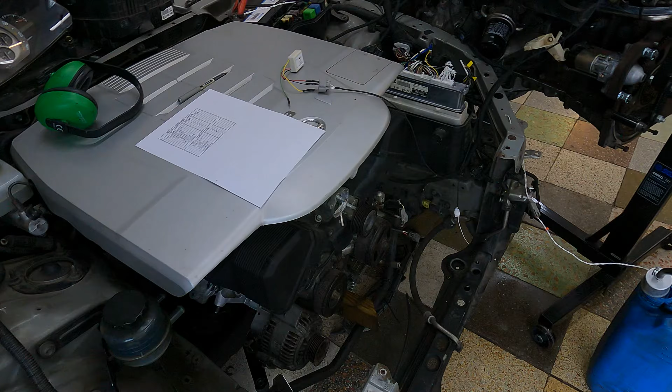Hello Seamus, this is your IS300 to IS200 plug and play harness. It is the adapted harness. Obviously we've used the original IS300 harness for you there. Obviously everything plugs in. This is your ECU. You've got your little patch harness there because obviously the ECU plugs are different to the IS200.

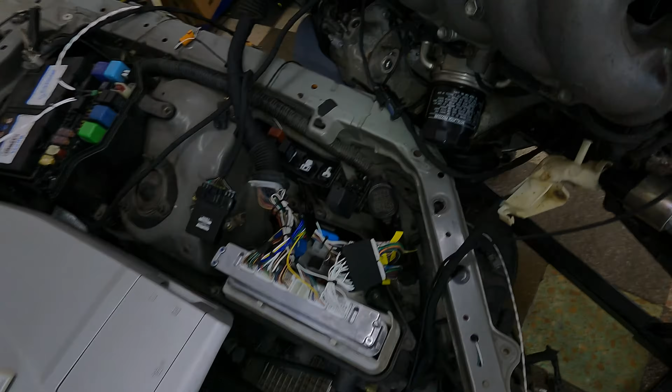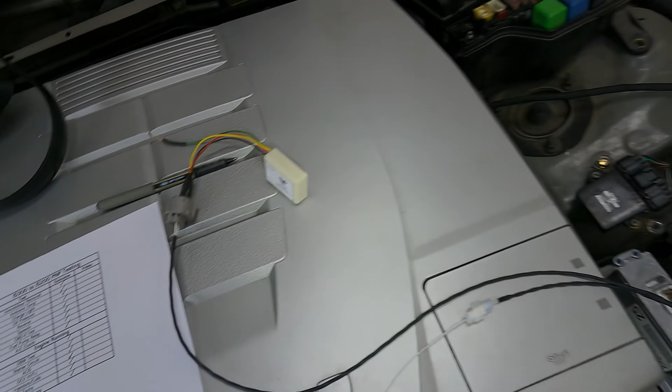Everything in here plugs in. That's all been changed around to be correct. And obviously using the J160 manual gearbox. So we've got the actual gearbox harness coming down here. So you see there's your reverse plug. There's your speed sensor plug for the J160. All right. So nice and simple.

Obviously it comes out the ECU box here. Now obviously I've got the engine here, so just bear with me. But yeah, so it comes out there, goes into the top there. You've got a section that goes underneath here, which bolts down there. That's obviously where all your injectors go. Your cam sensor goes. You've got your purge valve over there, or evap valve over there. You've got your ACIS over here underneath with this little canister.

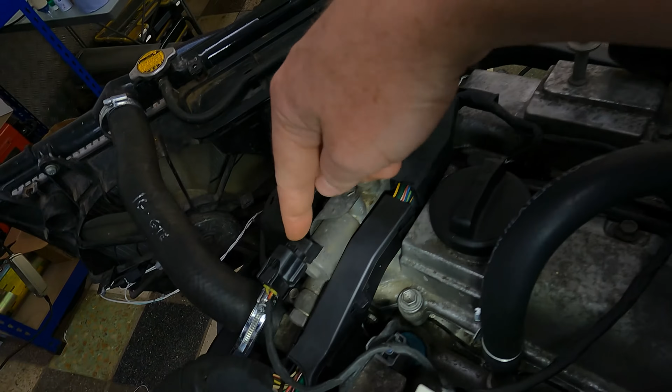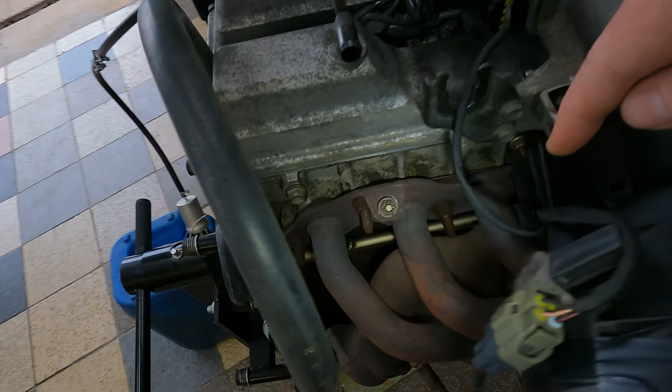Then you've got the section that goes over the top there, which is where your coils come out, and you've got your 3 coils along there. You've got oil control valve, and that comes out with these 2 front injectors over here. And then coming around the front here, you've obviously got this going along here to your drive-by-wire motor and clutch for your drive-by-wire throttle. Coming along the back here, you've got your pedal position sensor, and you've got your lambda sensor for bank 2 sensor 1.

Coming down the front here, you obviously got the breakout for your crank sensor, which is this one over here. You've got your alternator plug over there. You've got your thick cable for your alternator, which bolts on over there. And then you've got your lambda sensors for your bank 1 sensor 1 and bank 2 sensor 1. Sorry, bank 2 sensor 2.

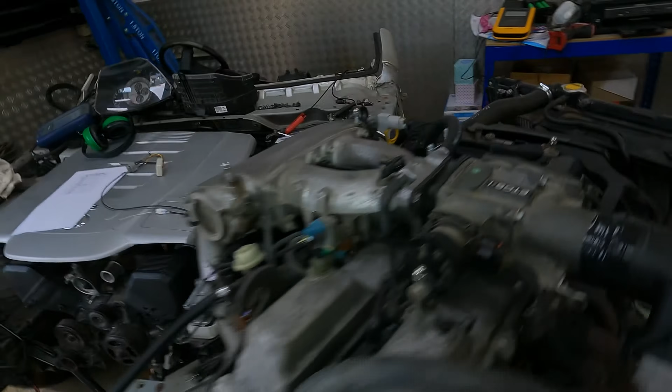Okay. Now we have wired up the other sensor. So in your IS200, you've got the sensor on the inside that goes along the exhaust over there. So just remember, you do have to fit that one in, or else you will get an error code for that. So it's basically that one over there that comes out and goes into the tunnel there. So make sure you put that one in.

Coming out the grommet, we've got your resistors, obviously, to remove the codes for the gearbox, as well as your ATEMU device or automatic transmission emulator. Okay, that's all hardwired in there for you.

Just a little note, obviously the IS200 ECU box doesn't fit the IS300 ECU. If you can get your hands on an IS300 ECU box, that'll fit straight in. Otherwise, this little lip around the side here, you can just grind that off, and then that will actually push all the way down. So there's your 2 options for you if you want to fit it in. So that's all of that.

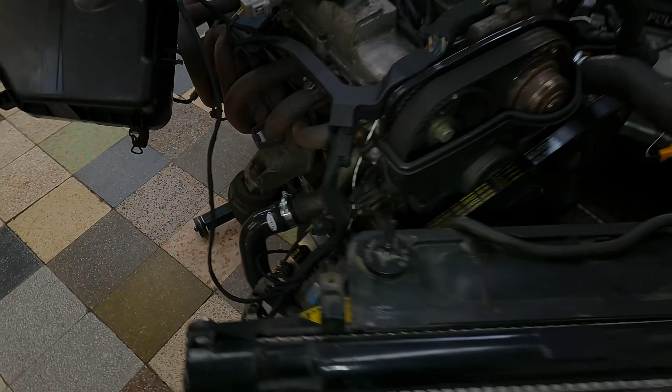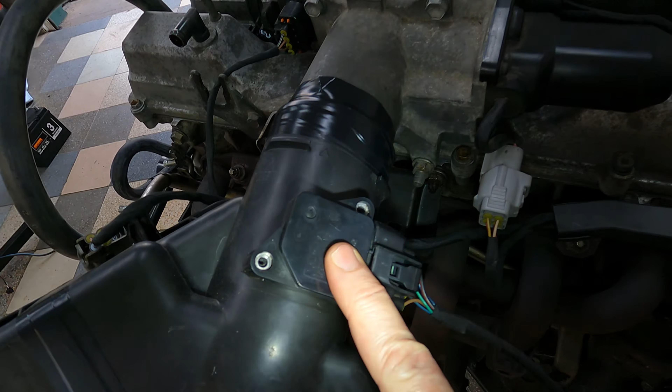Oh, and then the last one is obviously your mass airflow. So it comes out here at the bottom, and it goes into your intake pipe over there. So same type of MAF like this. This is the one that you need for the IS300. Okay, so hopefully you got that with your engine.

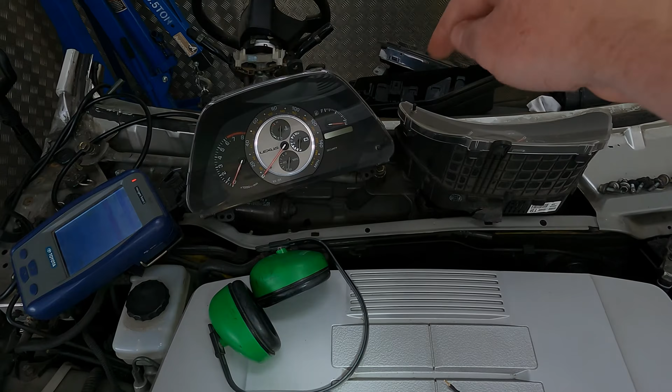Right, so what we're going to be testing is quite a few things. So number 1, obviously we removed the immobilizer, so we'll test that. So you'll see at the moment we've got a flashing security light. As soon as you put the key in, that'll go out. We're going to check the ambient temperature, or the outside temperature. So that's going to be on the inside where your climate controls are. We're going to check the charge lights and the oil pressure lights. Just make sure they come up on the dash, and obviously when we start it up, they'll go away. So we know that they're working fine.

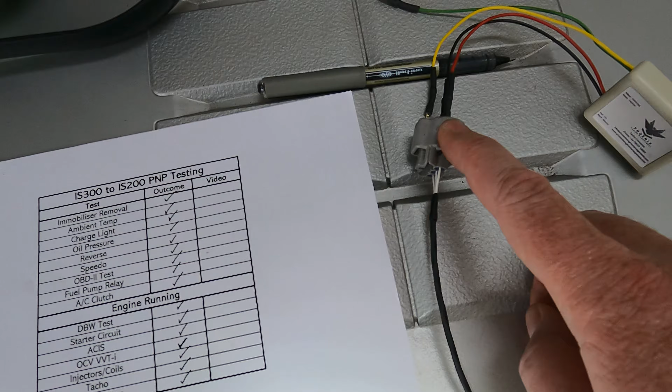We're going to test the reverse by bridging the reverse circuit. That'll make the beep go on. We're going to test the speedo by feeding a signal into the speed sensor plug, and that'll make the dash speedo work. We're going to obviously have our OBD2 machine plugged in here. So again, this is literally just plugged into your standard OBD2 port. This is the one that's obviously under the dash, hidden away. Obviously I've got no dash in here, so it's all hanging.

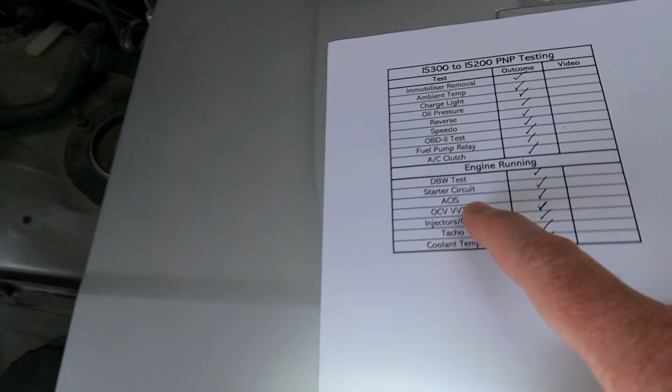Okay, then we're going to test the fuel pump relay via the OBD2 machine, just to show that's working. And then we'll test the AC clutch as well via the OBD2 machine, and you'll hear the relay in here click. So obviously that all works as it should. So effectively, as long as you plumb everything up correctly, that'll be fine.

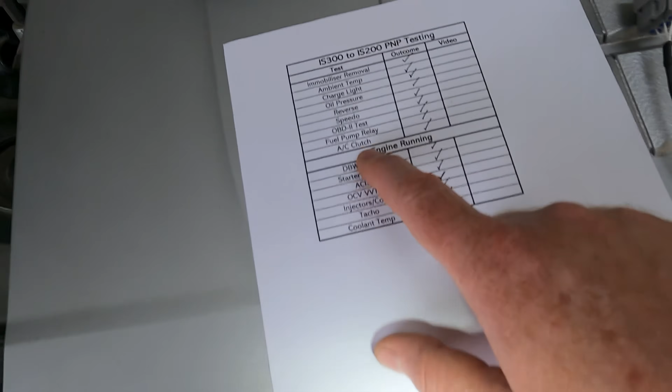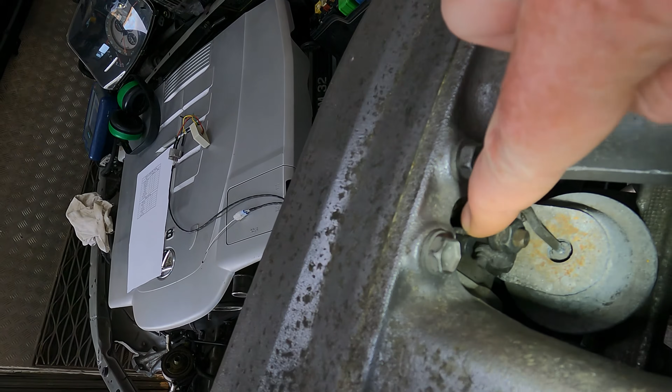Then obviously when we start the engine, we're going to test the drive-by-wire. So that's just basically pulling the accelerator, nice and simple. The starter circuit will be tested obviously as we crank it. We're going to test the ACIS, or acoustic control induction system. So that's basically this little valve over here. So it rests in this position over here, and as soon as I test it with the OBD2 machine, you're going to see it's going to pull closed. Okay, and that's controlled by that little canister and everything underneath there.

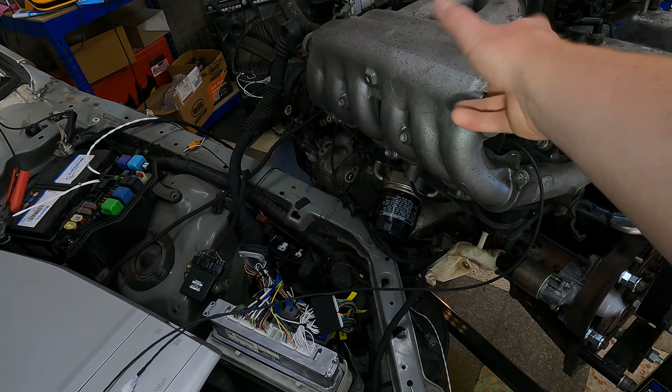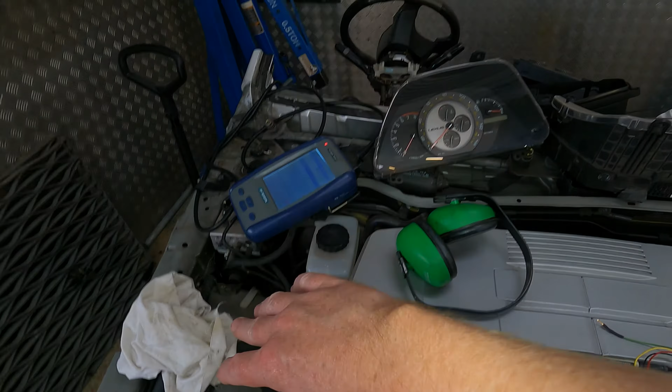So I've got a video on ACIS and how it works, but effectively it just halves the intake runner length, and that's what the little valve does. It opens valves and closes valves in there. Okay. We're going to test the oil control valve. So what we're going to do is we're going to go back to the OBD2 machine. We're going to test it. It's going to put the VVT into, like, max advance and so on and so forth. So the engine's actually going to make a horrible noise, probably die, but it means that it is actually working.

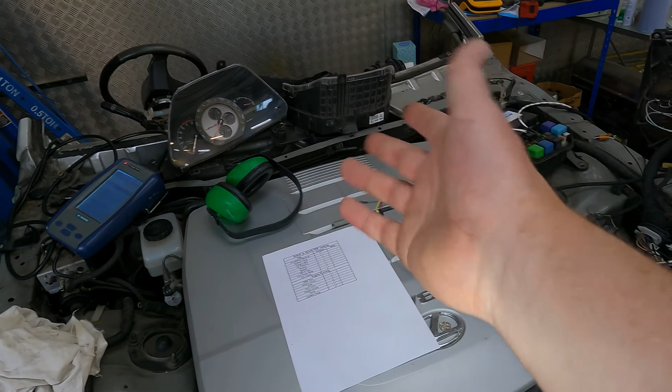Then I'm going to run around and I'm going to unplug all the injectors one by one, so we can see each actual cylinder is firing, but you'll hear it's pretty smooth when it runs. Obviously tacho is then going to come up on the dash here, so we can see that. And coolant temp as well, so we'll be able to see the coolant temp there. Obviously I've been testing it, so as soon as I put the ignition on, you're actually going to see the coolant temp because it is actually up to temperature now. Okay, so right, let's get to it.

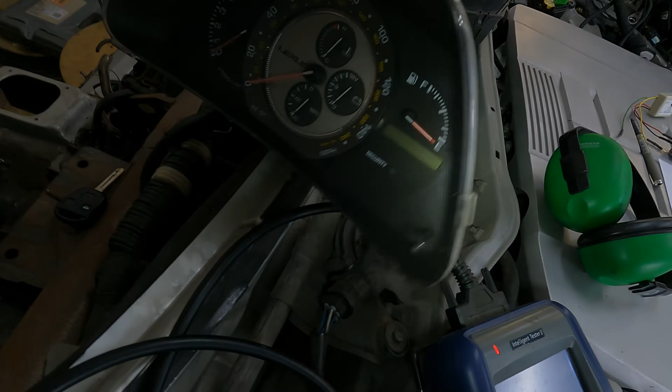So first thing we want to do is we want to test the immobilizer. So on a Lexus and a Toyota, the immobilizer is obviously indicated by the flashing LED over there. Now, obviously we've just removed the immobilizer, but we keep it so that it looks like you have an immobilizer. So you take the key out, the security light flashes. So if anybody walks past, they think you still have an immobilizer. Now then, I'm not even going to turn the key. All I'm going to do is literally put it in, okay?

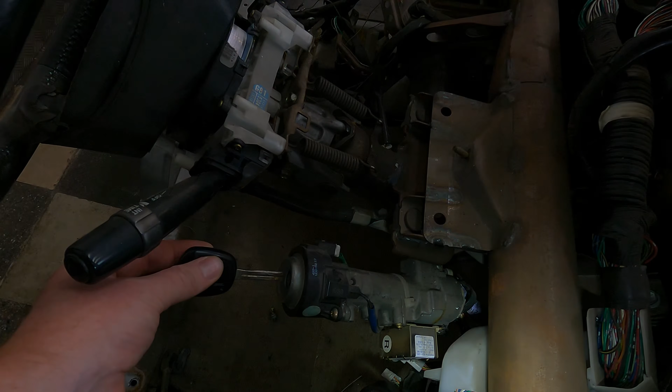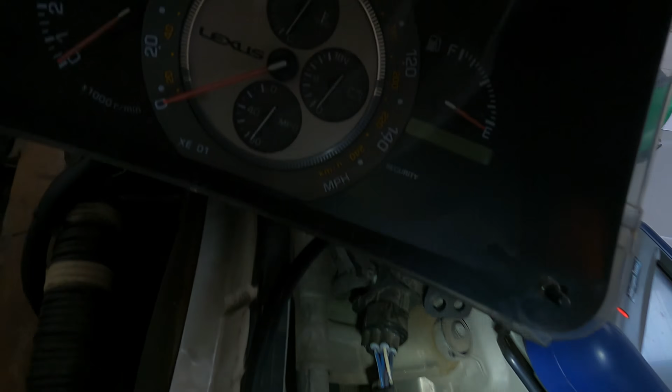And what that does is there's an actual key sense switch wire in there that goes to the ECU. It tells the ECU to turn on the relay, which then reads the key. So you'll see I'm not going to turn it to on because nothing else will come on. But as soon as I insert the key, you'll see now the security light has gone out. Okay, so your immobilizer is obviously deactivated.

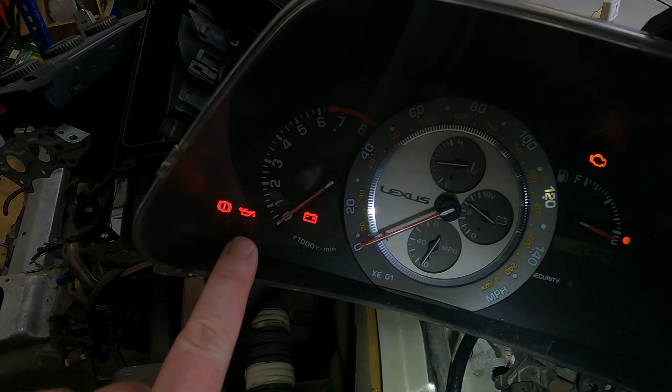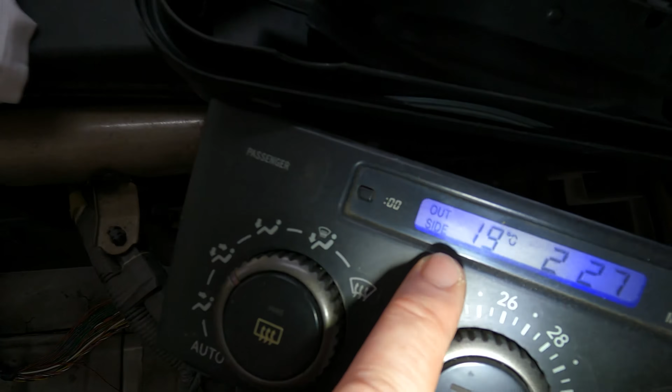And as soon as I turn the ignition on, you've got check engine light, you've got battery light, you've got oil light, okay? Now the IS300 did have a VSC system, not a TRC system. So I've removed all the TRC bulbs in here, but just make sure you do remove those bulbs, okay? Then coming along to here, we're just gonna check our ambient temp. And as you can see there, 19 degrees, so that's absolutely fine. So we know that's working 100%. Just going to turn this back around here so we can see it. Okay, so we've done immobilizer removal and the ambient temperature. We've obviously seen that we've got our charge light or alternator light and our oil pressure light.

So next up now, we're just going to bridge this reverse. So this is exactly what your gearbox does. So if you just bear with me. Right, so you see, I've just bridged it like that. And we've got our annoying reverse beeps going on there. So I'm just going to remove that, get rid of that.

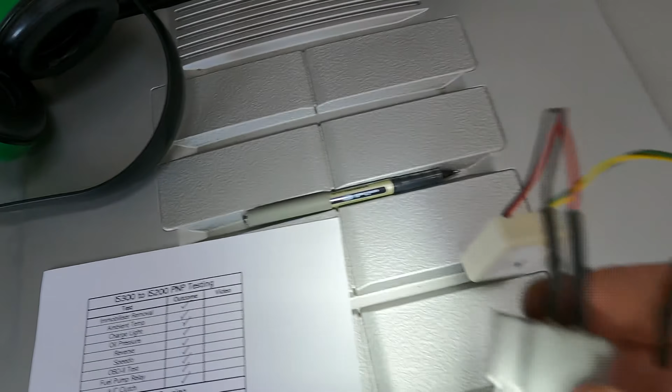Right, so next up we're going to do speedo. So effectively I've got a little device here that's going to output a signal from there. So what I normally do to make sure the system is working 100% is, this requires power and ground. So this is a Hall effect sensor, so you've got 12 volts and you've got ground, and we give the signal out. So I know 100% that this plug has all the signals that it requires to work. So just bear with me a second while I put it into test mode.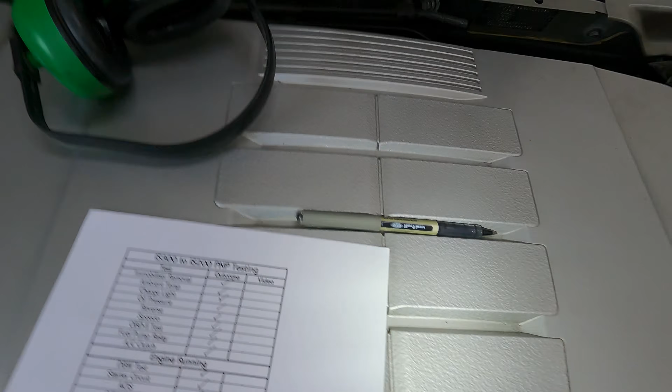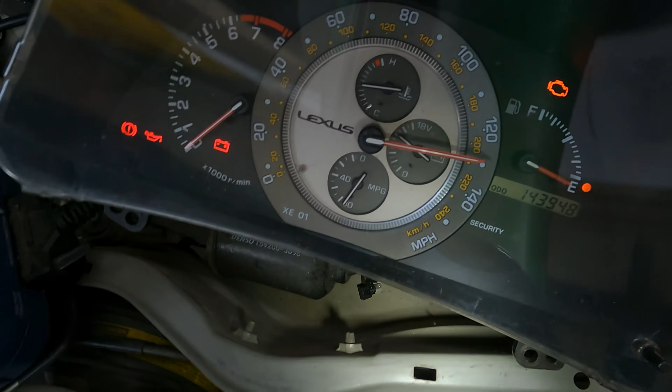Fantastic. Okay, so all I'm going to do now is pin number 3, the yellow one, which goes to the signal. And you see there now our speedo shot up. So we've got our 3 wires plugged in there. So I'm happy with that. Okay, so I'll quickly disconnect that, and as I disconnect that, well, that one's done. Right, okay, so we're happy with that.

Now we're going to go over to our OBD2 machine. These take ages to read, so I've already done it, but I'm going to quickly go into function. I'm going to go into system select, and you can see there IS300. So it is picking up that it's an IS300. All right. So we're going to go into there, and then we're going to be able to see all the live data like we would normally.

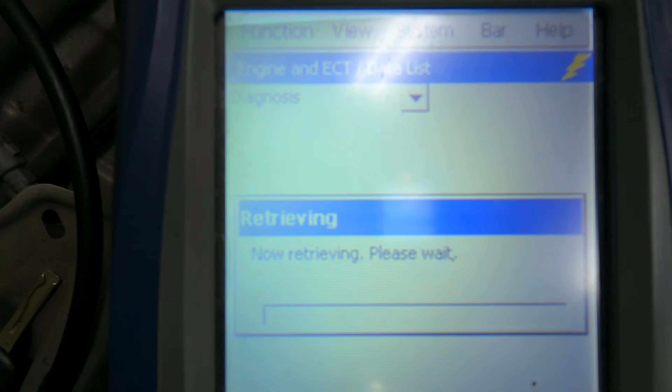So we'll just go into data list, and we'll see all the data start to appear there. So there you go, 78 degrees, 31 degrees intake air temp, 14% throttle. And as you can see, our coolant temp is working on there. So that's all perfect. All right.

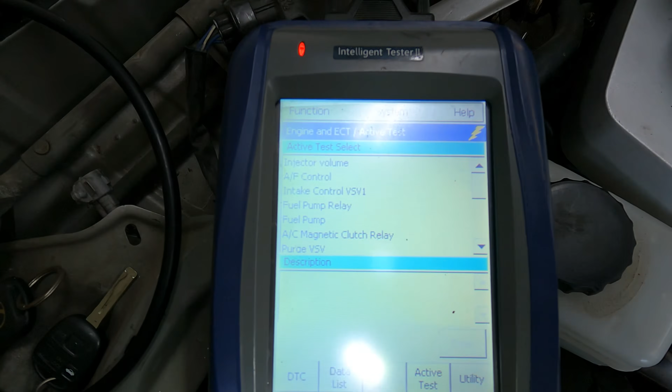So what we're going to do now is test the fuel pump. So I'm just going to go into active test. Now it says fuel pump, relay, fuel pump. I've got a video on how Lexus and Toyota fuel systems work, so if you are interested, go watch that. That explains why you have 2 different sections there. We're only interested in the fuel pump.

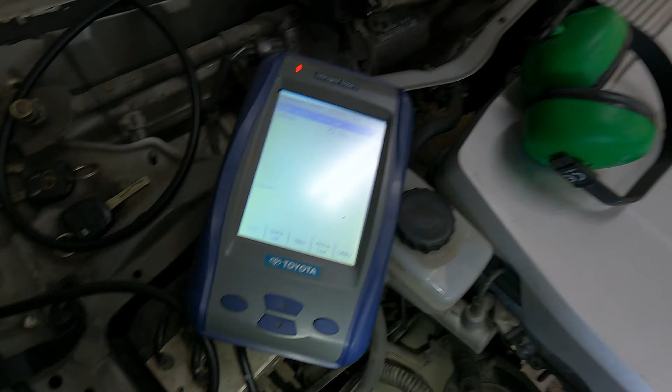Okay. And what I'm going to do is press that button to turn on the pump, and you can hear the relay clicking. And more importantly, you can hear the fuel pump working.

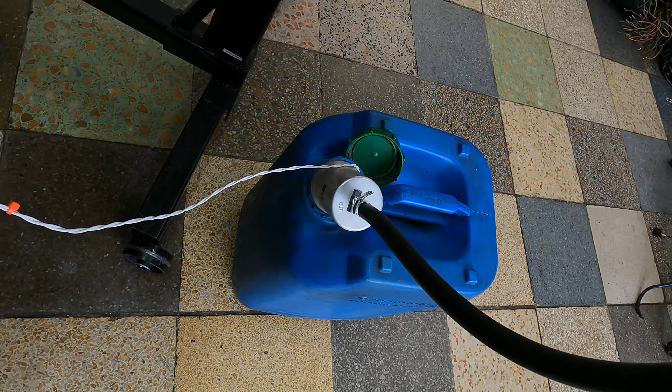Okay, so obviously the fuel pump's controlled by the ECU. Do watch the video about the fuel systems because it explains things like, obviously, they don't prime. So when you put the key in, it's not going to prime the pump. So just be aware of that. That is perfectly normal. That's absolutely fine.

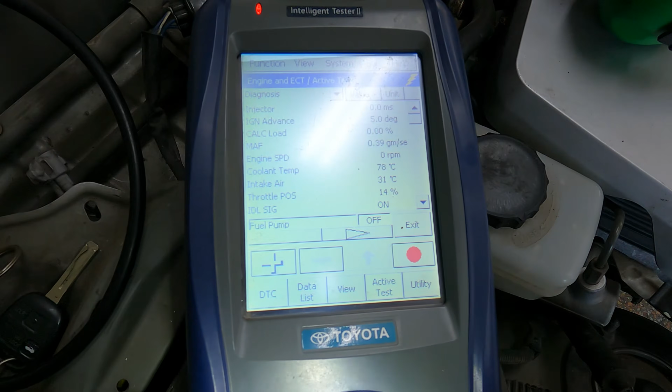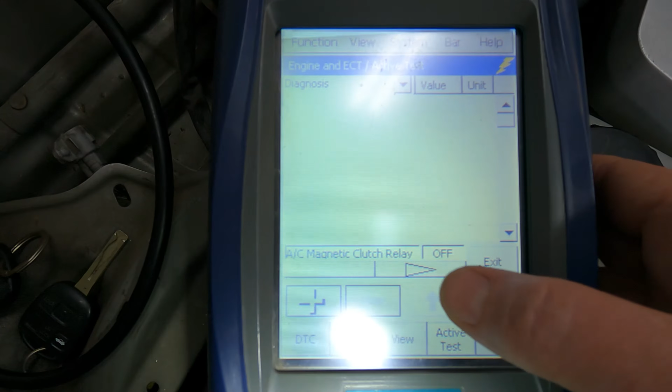Right, so next up we're going to do AC clutch. So again, we're going to go into active test. We're going to go AC magnetic clutch relay. Enter. And again, what we're looking for is obviously the clutch. Okay, you're actually going to hear, I've got it plugged in on the engine now. I'm just going to bring it a bit closer, but there's your AC relays.

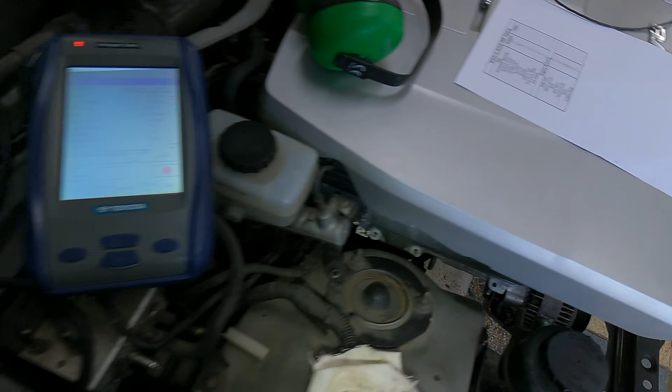Okay, and you might be able to see over there. Let me just see if I can. Okay, so I'm happy with that. The actual magnetic clutch on the front of the aircon pump, that's working, and the relay inside the car. So as long as everything's plumbed up and all your pressure sensors are there and working, AC will work just fine. Okay, so all that's left now is we're going to fire her up.

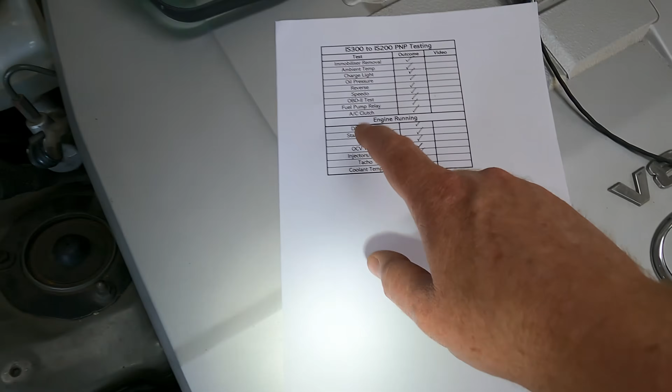We're going to test the drive-by-wire. Starter circuit will obviously be the fact that it starts up. It's nice and simple. We'll then go to the machine and we'll test the ACIS and the oil control valve. So the ACIS, I'm going to activate it on there, and then we're going to see this little valve. So this is the resting position, okay? And as I do that, this valve is just going to turn like that, okay? So that's effectively how we're going to do it. I'm going to show you that's the case.

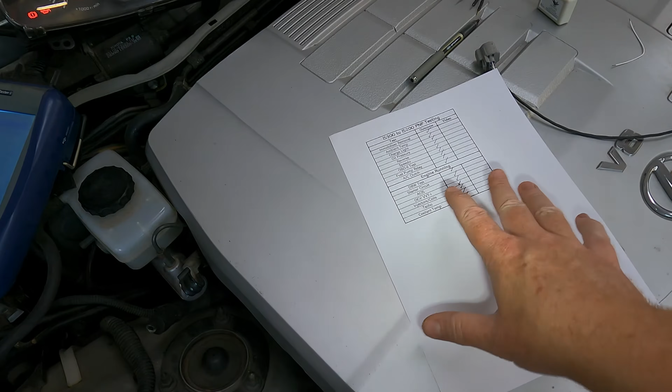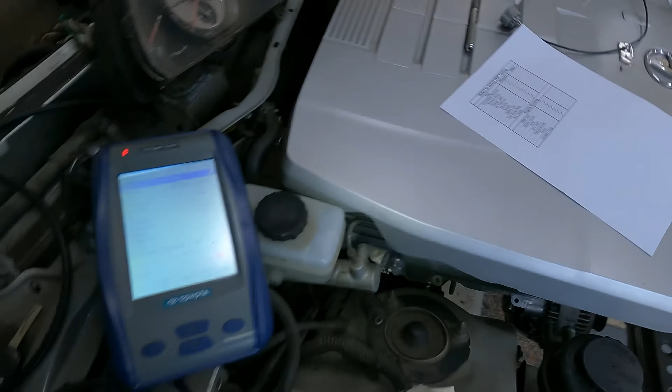So I'm going to start her up now. I'm going to put my earmuffs on quickly because it's going to be loud. Okay, so I'll point to everything as we go along, but I will keep talking because usually you can hear me. So again, as it's plug and play, you just turn the key. So 3, 2, 1. Okay. So drive-by-wire test. Okay, that works. Starter works.

ACIS. So you can see now that it's in that position. I'm going to go to active test. Going to go to intake control, vacuum solenoid valve. Turn it on. As you can see, that's now in the down position.

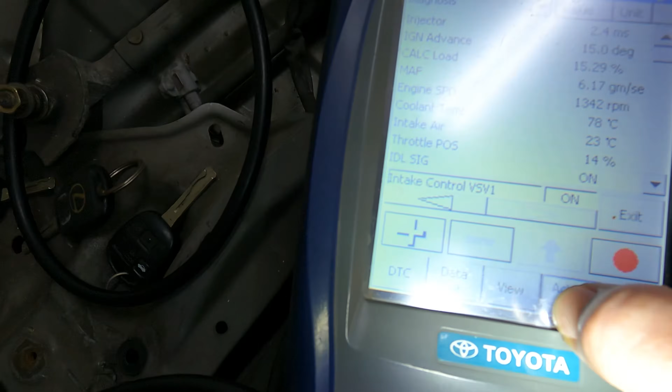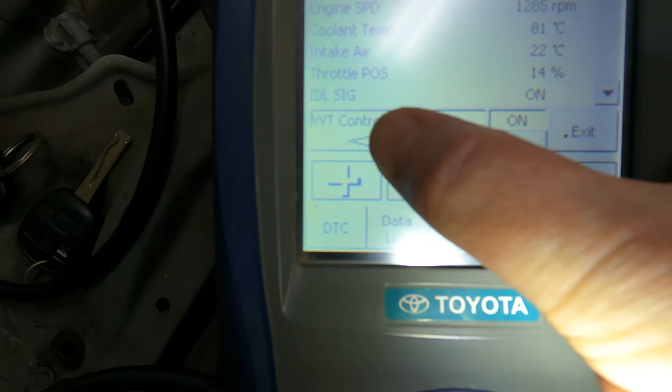Okay, now we're going to test the oil control valve for the VVT-i. And that's going to clean up here. That's effectively what it's going to do. We're going to enter that. Okay. Okay, so hopefully you heard the motor make a really different engine note as we tested that.

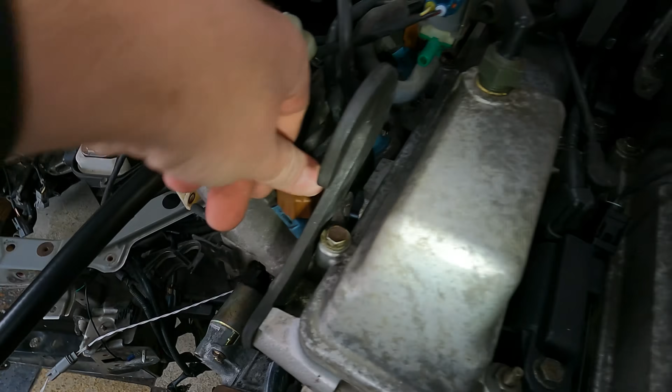So now we're going to test all the injectors and coils by taking them off one by one. So we're going to start with number 6. Number 5. Number 4 underneath there.

Then we've got number 3 over there. Let me go right from there. Okay, then we've got number 2 over there. Then we've got number 1.

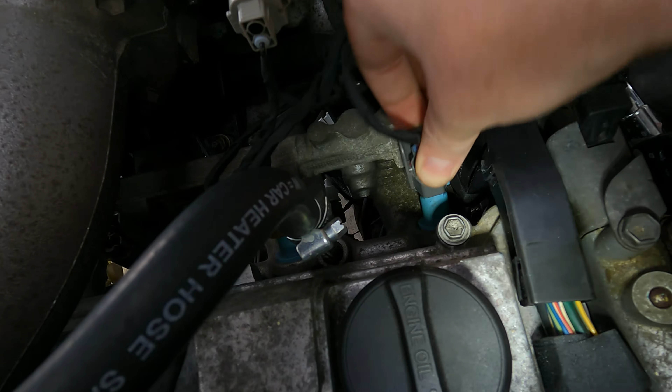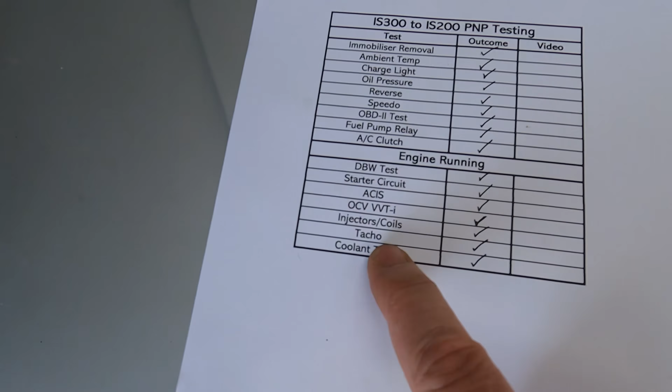Alright, so we're going to check the tacho out, and there you go. So that's all working as it should, and coolant temp is obviously working as it should. Okay, I'm going to cut that off quickly.

Alright, fantastic. So as you probably noticed when I was doing the injectors, they are color coded. So 1 is grey, 2 is brown, 3 is grey, 4 is brown, 5 is grey, 6 is brown. That's a nice easy way to tell which injector goes where. You should never have 2 colors of the same next to each other.

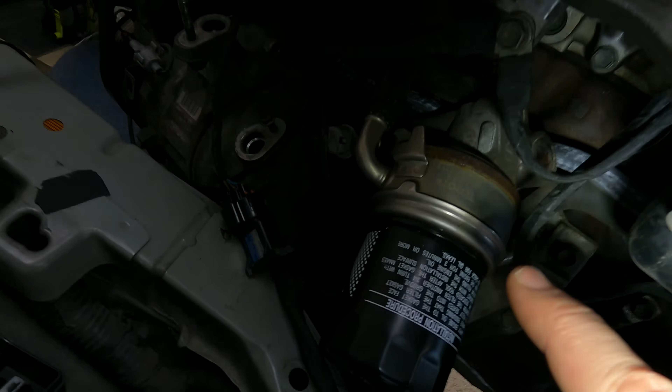Okay, the one thing I don't think I went through was all the wiring underneath here. So you've got your earth straps over there, one belongs there. We just put them into one place, but basically one belongs there and the other one belongs there.

You've got your knock sensors there. I don't know if you can see, I'm trying to get pointed past my shadow. So you've got a knock sensor there, and you've got a knock sensor at the back here. You've got your wire that comes down to your starter motor over there. You've got your ACIS underneath there.

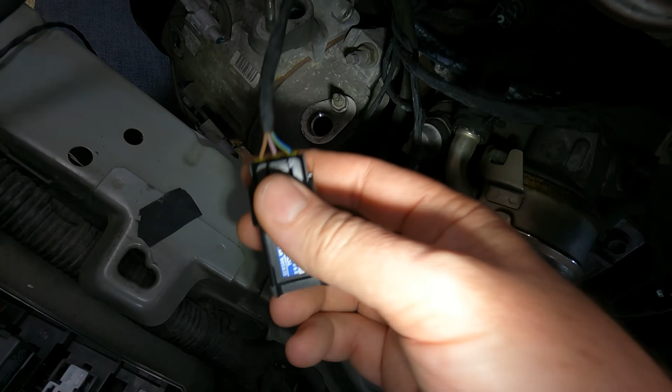Now, this is important, this is obviously your power steering pressure sensor. The IS300 actually had a pressure sensor on the power steering lines, so try and get the IS300 power steering lines. If not, if you want to just get rid of the code, this is actually an IS200 map sensor from your intake - yank it out, plug it in, tuck it away. It won't give you a code for that.

There's your aircon pump down there, so that plugs straight into there. And then you've got your other hard line for your alternator, which comes out and goes directly into there. Okay, so that's all the underside that you see underneath there. Rest is all straightforward, it's all on top here and goes along there like that.

Okay, so I'm happy, she runs really nice and smooth, all the cylinders are firing as they should, so that's all good. So the only thing left on your side is obviously drop the motor in, really straightforward. Once you've dropped it in, you're going to plug everything into your ECU, stuck it in here. You're going to bolt down your igniter, which lives on the top of the turret here.

These little resistors get incredibly hot. So what you need to do is either mount them down the side here or make a little plate on the top and just mount them on there. We're giving you plenty of room, it's about half a meter, so you can tuck them down the side there, or put them over there, whatever you want to do.

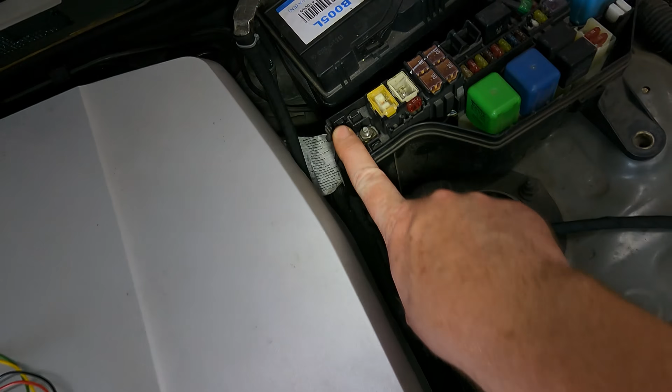You're going to have your main alternator, which is going to bolt in over here. Now from your battery, you've got 2 positives. So you can use your existing 1G starter, which is a short one that bolts onto there. And then underneath that one, you'll see there's another cable, and that goes down from there into the bottom of this fuse box there. Okay, so those are your 2 powers that you've got.

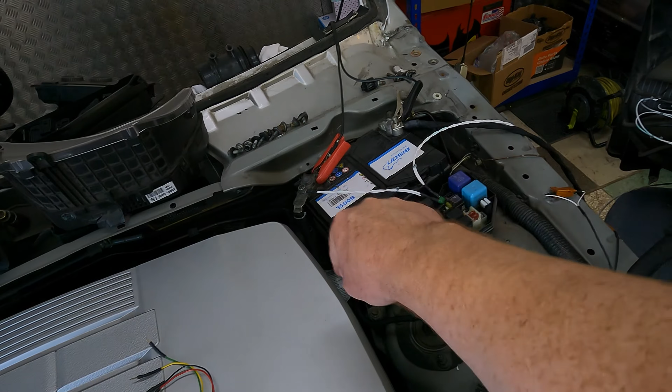You've got your earth, which is going to go on your battery. Again, you can use a standard one, but it basically goes from there, underneath, bolts to the chassis, goes down the side, and then bolts to the block. Okay, and once you've done that as well, there's little plates on this side over here - I've moved them off my engine, don't need them. But there's an earth strap that goes from there, and then you can bolt it onto this mounting point at the front there.

So those will be the only earths that you need. Make sure they're nice and clean. If you're going to be pulling everything out, what I normally advise is take the battery out, go underneath - as you can imagine, water and stuff just sits in there. Clean it all out. Take the earth out, give it a good clean with maybe some emery cloth or whatever. Put it all back in. Make sure you're happy with that. Toyota's earthing - just put as many earths as you can. But you should be good with just the 2 that you've got over there.

Okay, so that's about it really. Hopefully that's everything that you need to know. If you have any questions, don't hesitate to ask. Everything is relatively straightforward - plug in.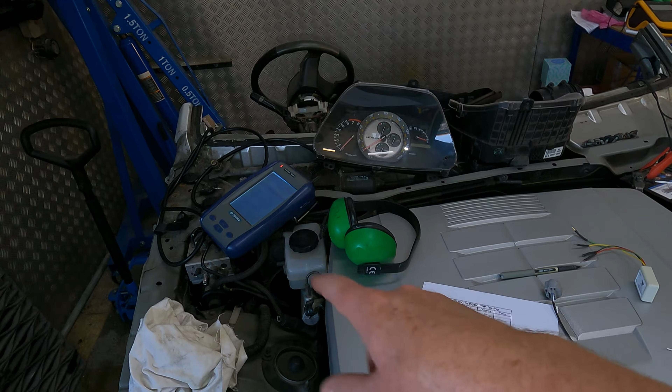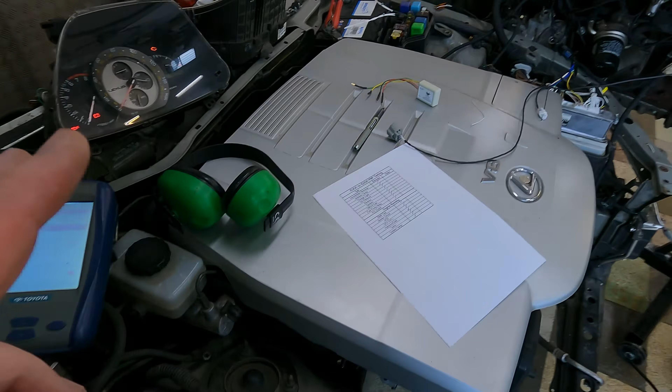You've got your OBD2 diagnostics if you want. Or what you can do as well, if you turn the ignition on, depending on which exact year 2001 you have, there's another way to read diagnostic codes, which is really nice and simple. If you've got a pre-2001, you'll have this little diagnostic box here at the front. If you don't have that and you've got a post-2001, you've got the OBD2 diagnostic ports.

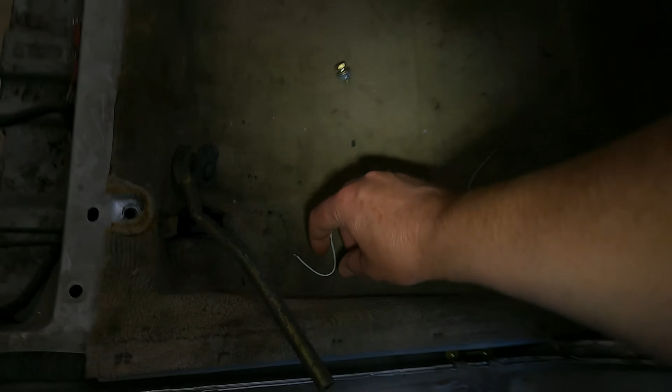Both have the OBD2 diagnostic ports, but effectively what you can do is take a paper clip and bridge pin 4 and 13 of that one over there. What I'm going to do, because I have this vehicle and it's easier to get in there while I've got that plugged in, is just bridge it here.

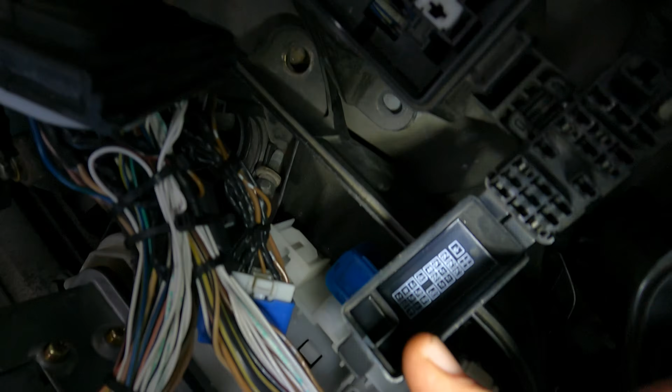If you do have this, you're looking for E1 and TC, that's basically what you're looking for. It's all labeled in there, but just so you can see what it is, you've got very few wires actually in here. So this is E1 - you'll see in this little section here you've only got 1, 2, 3, and a couple over there. Looking here, bottom row there's plus B1 - oh sorry, my bad. That is E1, I apologize, it's this row of 9 over here. And looking down at the bottom there, TC is the middle one of this row over here.

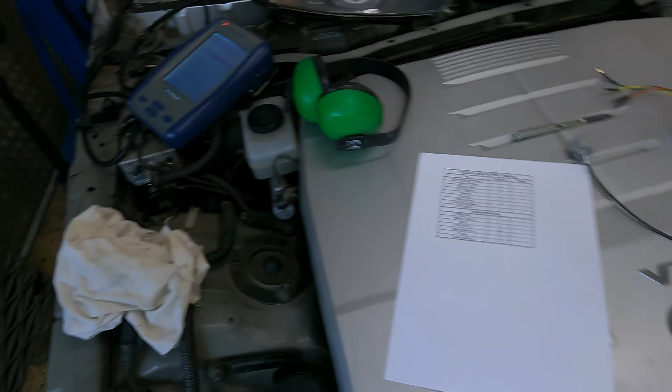So I'm going to move over to the dash now to show you basically what happens. But effectively, as soon as I bridge that, which I'm going to do now... okay, alrighty. So when you bridge the TE1 or TC and E1, it puts it in a diagnostic mode.

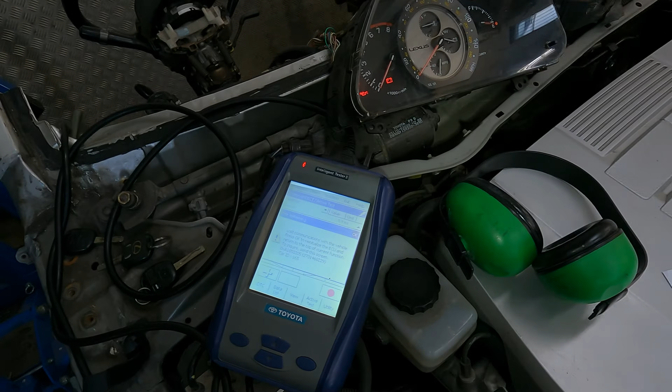Okay, so like the 3UZ and the IS300, unfortunately the check engine light doesn't flash, so I do apologize about that. But basically what this does is put it in diagnostic mode, so there is something nice you can do with this, and that is check your timing.

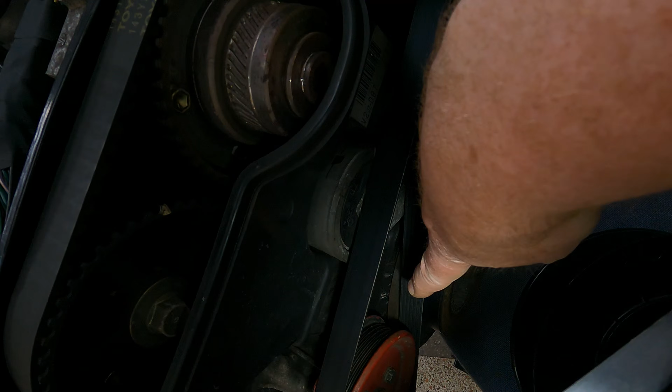So if you're ever worried that your timing belt is out of sync or whatever, you bridge those 2 terminals, and effectively what you're going to do then is look down at your engine over here, you're going to see you've got timing marks on the crank there. Now there are 2 timing marks on the pulley, so make sure you've got the right one. But you can use a timing light on coil 1, which is this wire over here, and you can check your timing. So if you bridge those 2, it'll lock it at 10 degrees.

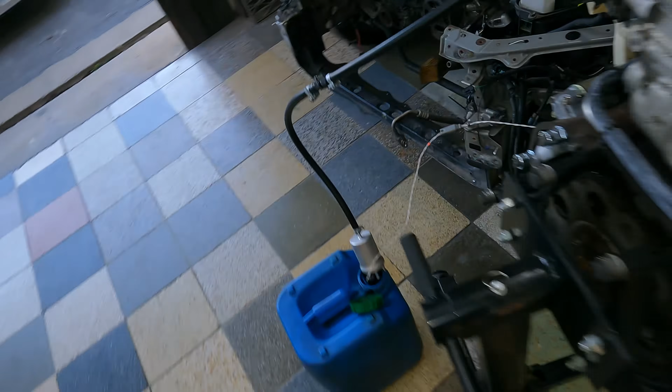So I'm just going to pull that out now. Okay, so that's another little useful tip if you've got there. But like I said, you do have OBD2 diagnostics over here, so you can get all your information from one of the Bluetooth readers over there.

Okay, so hopefully that's all nice and straightforward and simple. It shouldn't be too hard to fit in once you've got it all in. Plug it all in, away you go, and yeah, so she'll turn on the first turn of the key and you'll be ready to go.